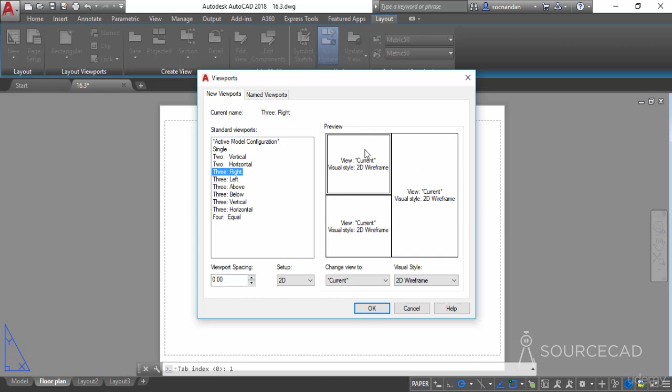So I'll select this viewport configuration, click on OK. Now click at a starting point. So I'll click on this top left and I'll click on this bottom right, and all the viewports will be fitted within this area. Now in this case, as I mentioned earlier, if you double click within any of these viewports, it will activate the model space, and also all of these model space tools will be visible.

Now if you modify anything within this model space, then it will also be modified in the original model space, and it will also modify all of these remaining drawings. So if you just try to add a circle, let's add it here. I'll add 1 circle here. You'll notice that the same circle will be added here as well as here.

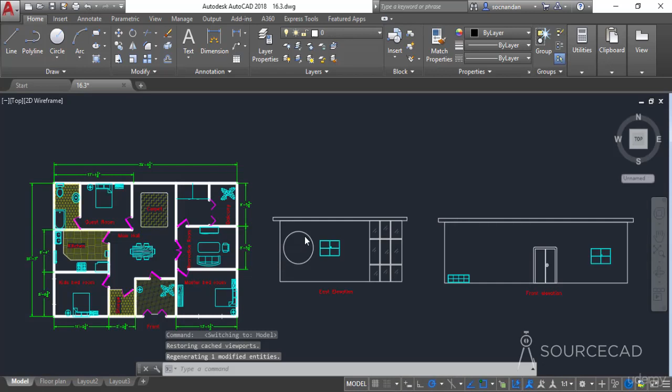I'll click outside, so I'll double click here. Now I'll go to model view, and we have the circle here also. So that is simply activating the model view, and we can now remove it, and that will be removed from all of these instances of layout and model space.

Now in these cases, you can zoom in and zoom out this drawing, and this may even happen accidentally. So what if you don't want to change the position of objects within a viewport? In that case, you can simply lock it. So right now I have set this object here, and right now you can see that only east elevation is visible in this viewport.

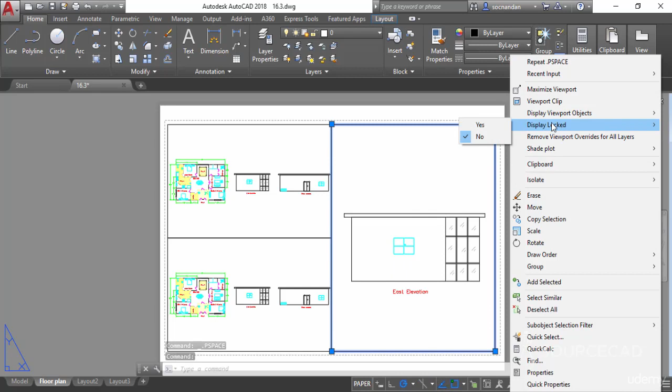Now let's say that we want to lock it so that the changes don't affect anything within this viewport. So for that, I'll double click outside. Now I'll select the viewport boundaries, and then I'll right click and select this display locked option and select yes. Now we have this viewport completely locked. So let's double click inside.

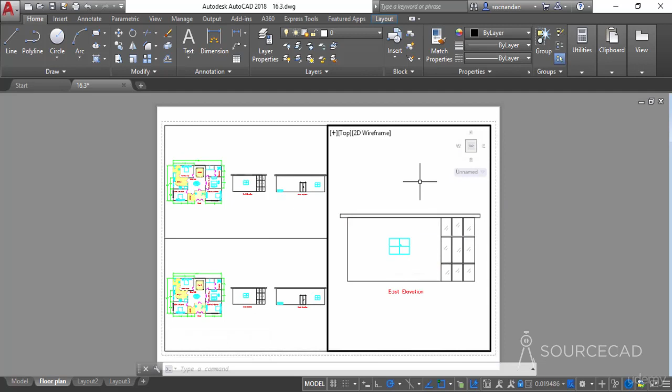We still have these model space objects, but when I zoom in and zoom out, it will zoom out or zoom in the complete layout, not the objects within the viewport. You can not only lock and unlock this viewport from the right contextual menu, but you can do that from the layout tab also. So go to the layout tab, and now as you know that this viewport is locked. So when I zoom in and zoom out, it is completely locked.

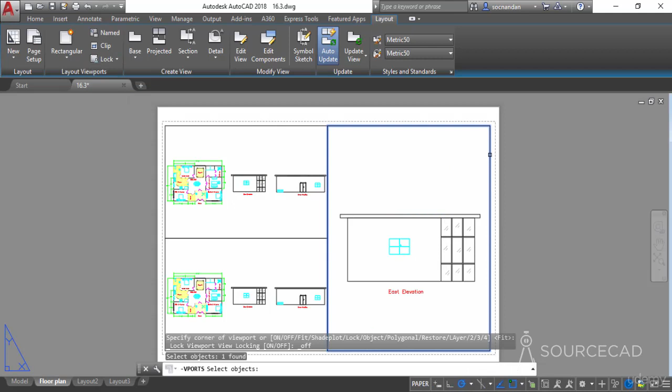So in order to unlock it, go to this layout viewports panel and select this unlock option. Now select the viewport which you want to unlock. In this case, I want to select this one. So I'll select it and now press enter. Now it is unlocked. So now if you zoom in or zoom out, it will affect the complete drawing within this layout. So I'll double click outside, and now we have this layout view deactivated.

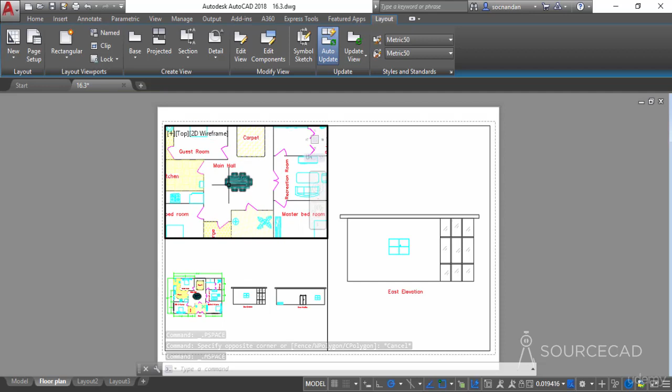You can also clip viewports to show some of the selected regions. For example, here we have this viewport. Let's double click within this and I'll zoom into this area. Now let's say that we only want to show this main hall and we don't want all of these objects. For that, you can simply drag these boundaries. So I'll double click outside and I'll select the boundary, or I'll just simply drag it like this.

So you can do that, or there is an alternate method also. Using that alternate method, you can simply create a new boundary and that will be shown instead of this viewport. So I'll double click outside and I'll select this clip option. Now select the viewport which you want to clip. In this case, I want to select this one. Now press enter. Now specify the starting point.

So this will be the starting point somewhere over here. Now the second point, the third point, the fourth one. And in this case, if you want, you can select a little bit random shape also. So I'll simply click on this point and then on this point. Now this is the boundary which we want finally. So I'll press enter. And you'll notice that the boundaries will be clipped just like this, and that viewport will be removed. So that's the main hall which we have in our view.

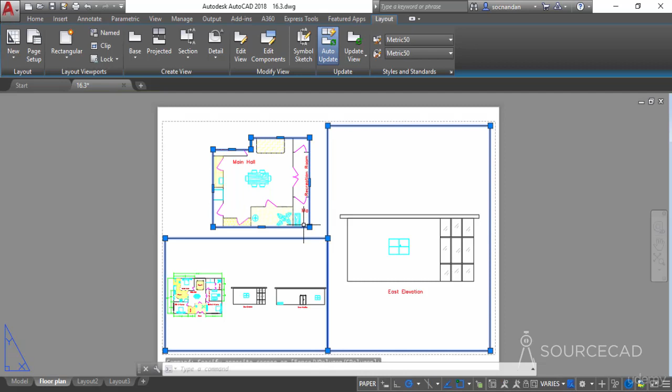You can not only make your viewports in rectangular shape, but you can also make them of very random shapes. So I'll remove all of these viewports for now. And now I'll go to this rectangular option once again. And now I'll select this polygonal option. Now you can create a polygon. So I'll start with this point. Then I'll click at this point. Then this point. Now I'll select arc, because we can make an arc with this polygon option.

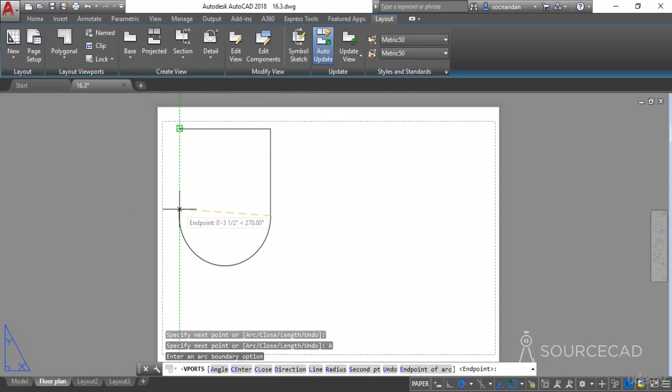Now I'll track this point. I'll click here. Now I'll select line and I'll click at this point and press enter. Now we have a completely random shape of viewport. As you can see here, you can double click inside and that viewport will be active. Let's double click outside. So you can not only make it with the polygon, but you can also use objects.

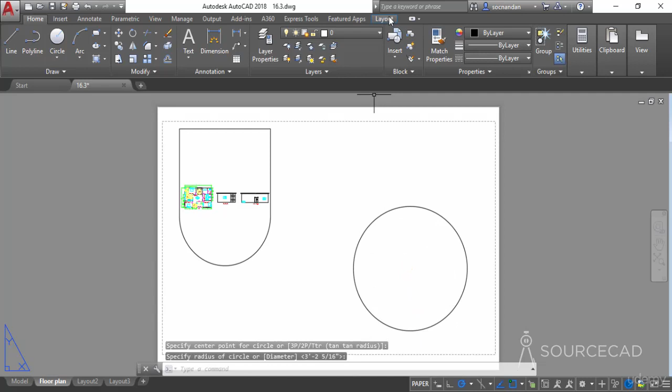So I'll go to home tab. I'll select a circle. Let's say that we want a circular viewport. I'll make a circle. Let's get back to layout. Now select the drop down and select object. Now click on this circle and we have a new viewport, a circular one. So double click inside and we have it here just like this. Let's double click outside to deactivate it.

In all of these situations, the objects within the viewport will always remain visible, but you can hide them temporarily if you want. For example, if you don't want to show any of these objects within the circular viewport, simply select the viewport boundary, right click and select display viewport objects. In this option, select no.

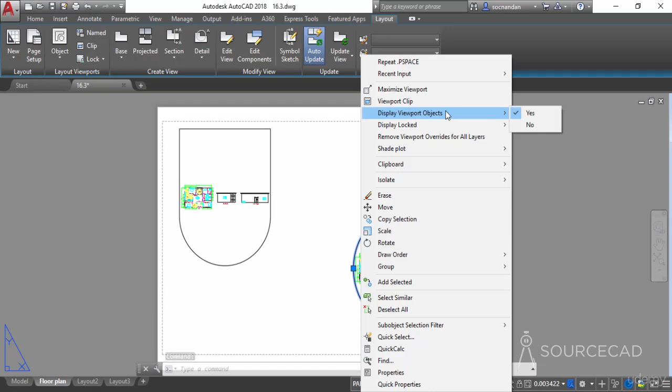And now all the objects within the viewport will be hidden, even though the viewport is still there, but nothing will be visible. In order to make it visible again, select it, right click, go to display viewport objects and select yes. And the objects within the viewport are again visible. So that was all about making our viewports and clipping them.